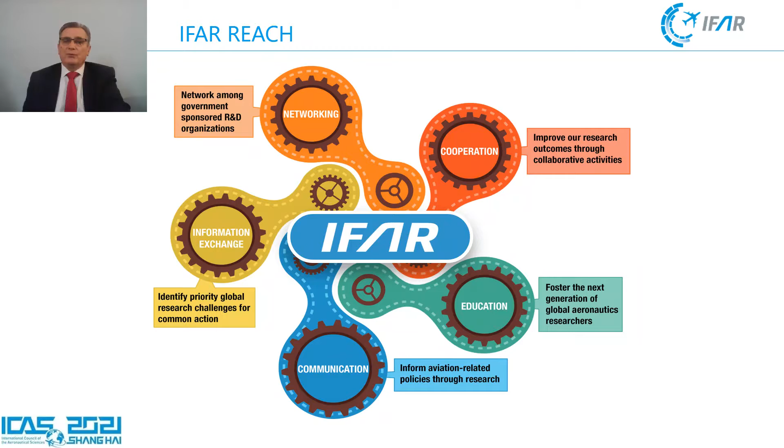Thank you very much and welcome to the IFAR ICAS lecture 2021, which is the ICAS conference general lecture number 5. The title is IFAR's Perspective on Sustainable Aviation. And the question is, can we achieve zero emission aviation and how can we achieve zero emission aviation? My name is Rolf Henke. I'm talking on behalf of the German Aerospace Center, DLR, and I will come to the other authors in a minute.

About a year ago, 13 members of IFAR published a paper on zero emission aviation. In Germany, where I come from, we have a paper on zero emission aviation from the DLR and the German Industry Association, BDLI. We have a couple of thoughts on sustainable aviation fuels. We have thoughts on FlyZero from the UK Aerospace Technology Institute. And we even have concrete aircraft by Airbus, ZEROe. So these are 3 types of aircraft flying with hydrogen. So a big topic, time to think about it, time to discuss it, which is the title of this IFAR ICAS lecture.

This lecture is organized in 6 chapters. After my short introduction, Sergey Chernyshev, our present chairman of IFAR and the chief scientist of the Russian TsAGI, will address the translation of zero emission into top-level aircraft requirements, TLARs. I will talk a little bit about the propulsion system and energy storage afterwards. Then Xiasheng, the head of the Chinese Aeronautical Establishment, CAE, will address the airframe systems.

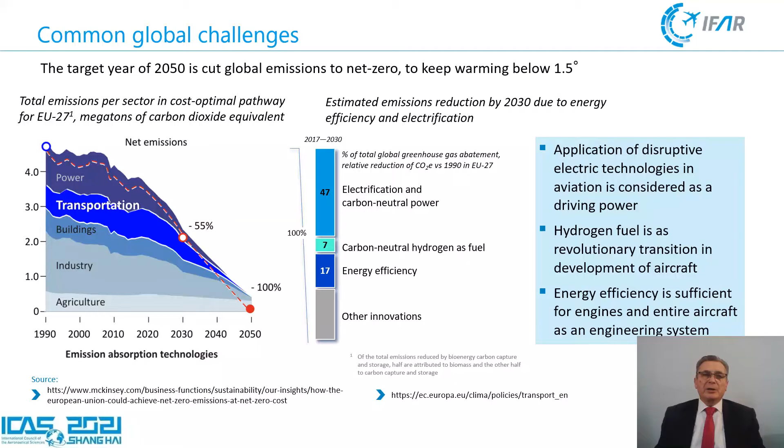An application of the cryogenic fuel is considered as a revolutionary step for the future of aviation. To make these steps, various IFAR research establishments and global aviation organizations develop their respective strategies and technology roadmaps. They introduce slightly different approaches, but more or less they come to the same strategic solution, considering liquid hydrogen as a fuel of the future. In the Russian Federation, the hydrogen initiative for the national economy has been approved on the government level.

The group of several IFAR members has recently developed its own view on zero-emission aviation. We call it ZeMA. The ZeMA group is aimed at the development of aviation which is free of negative impact on the planet, meaning close to zero emission, for the entire product life cycle. The ZeMA declaration was introduced to the world aviation community and public at the Berlin Aviation Summit in November 2020. It can be found in the public domain.

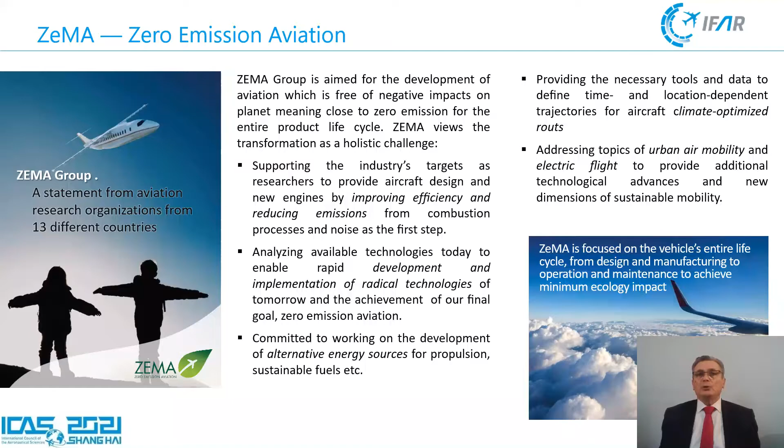By considering the various innovative solutions, it is required to define the profile of the future aviation transport. The task for the nearest decade is to implement upcoming technologies in future aircraft and to provide the technology basis for the next generation of aviation. By solving the problem of clean air transport, the focus was made on the class of aircraft that have the most severe emission share of CO2.

Considering technologies available now and in the nearest future, the reasonable concepts come to mind. Application of electric and hybrid electric power as propulsion for the regional and short-range aircraft applied on the typical routes connecting European countries, American states, distant state regions, etc. Application of the hydrogen fuel for the mid-range aircraft with approximately 100 seats or more.

The future concept should be proposed using real market parameters that would define so-called top-level aircraft requirements, such as fuel type, typical range, design cruise, emission level, noise level, operation costs, service goal, airport class. Based on these numbers, the proper selection of the technologies and their integration should be performed. Of course, the influence of other factors should be kept in mind. When we talk about application of new fuel, it is obvious to consider the corresponding infrastructure development and operation.

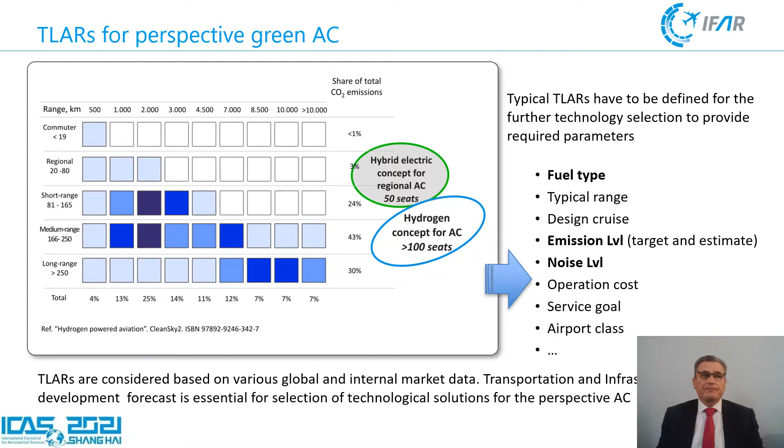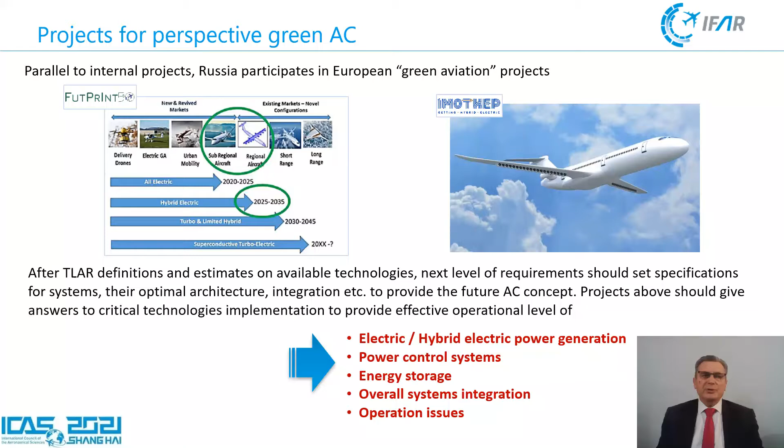Currently, Russia is participating in two European projects that cover the technology research on the mentioned aircraft types. The first one is FutPrInt50, which should provide the technology basis and system integration for the 50-seat regional aircraft. The second one is aimed at technological solutions for more than 100-seat passenger aircraft. Projects should give the answer to the critical technologies implementation to provide an effective operational level of electric, hybrid electric power generation, power control systems, energy storage, overall system integration, operation issues.

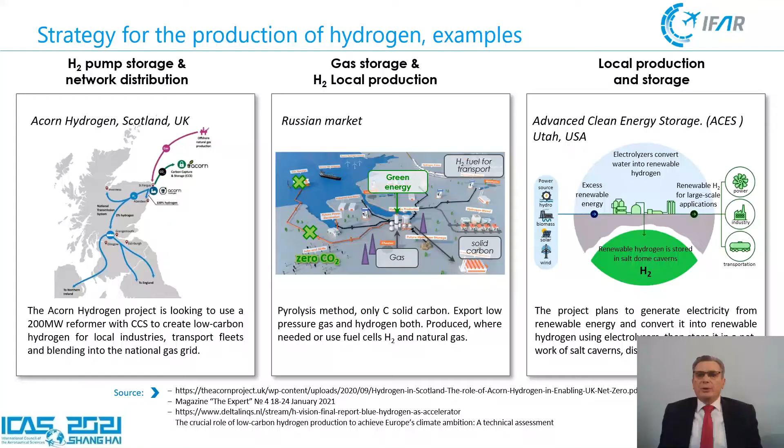As was mentioned before, the development of infrastructure is an integral part of the transportation system. Here in the slide you can see some examples of the strategies for the production of hydrogen. Various ways to provide future consumers are considered: H2 pump storage, network distribution, gas storage, and liquid H2 local production, etc.

And returning back to TLARs, for the regional aircraft, different concepts have been analyzed. TLARs should be implemented in the best way by considering available and upcoming technological solutions. Understanding of technological gaps helps to specify the topics of new studies and research programs. As an example, here in the table you can see the parameters of the regional aircraft required for the Russian market.

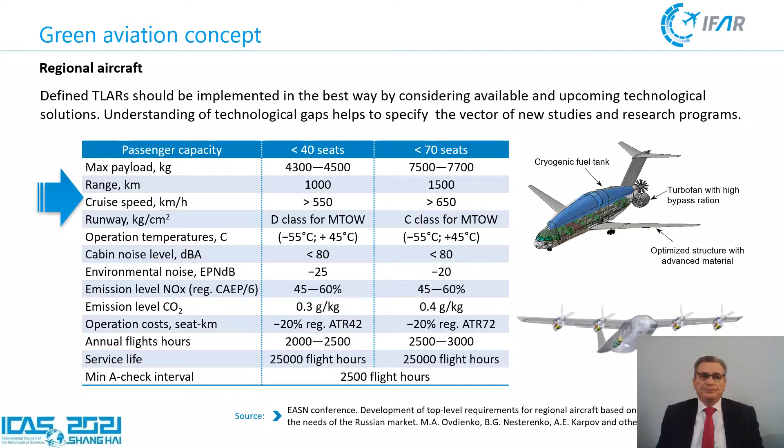To cover the technological gaps defined along with key technology development, the conceptual studies should specify parameters of aircraft systems for the future development. Shown in the slide is this example of a regional aircraft with a hybrid electric engine. Currently, there is a set of research projects in Russia aimed at technology development for hybrid electric aircraft with application of high temperature superconductivity technology. The concept aircraft is under development right now.

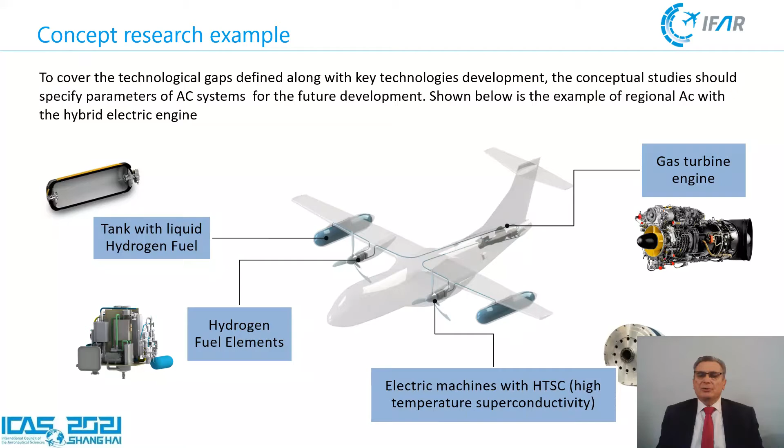At this stage, the flight technology demonstrator was developed and assembled by the Russian project consortium, led by the Central Institute of Aviation Motors, CIAM. This project has passed several successful stages, and target parameters have been reached both in the ground tests and in flight experiment. The technology demonstrator of hybrid electric propulsion installed on the Yakovlev Yak-40 jet engine aircraft flew in July this year at the International Moscow Air Show MAKS 2021. It uses an electric engine with a superconducting electrical system that was placed in the nose of the fuselage.

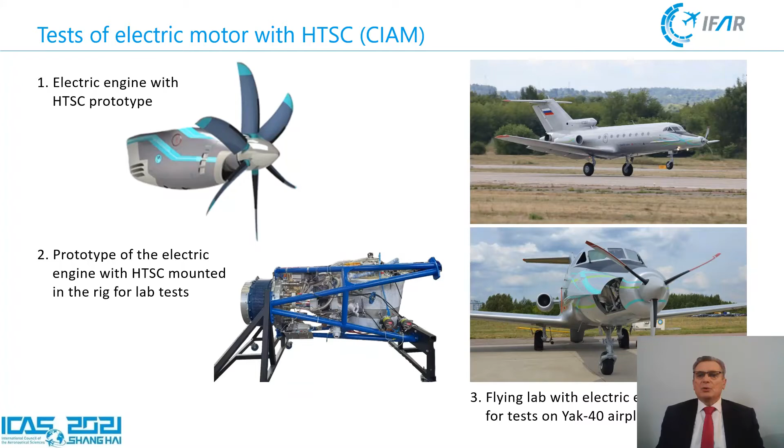Top-level requirements for large aircraft bring new challenges. Entire new approaches for aircraft design must be developed. Hydrogen as a fuel will radically change the aircraft configuration and structure for middle and long-range aircraft.

New airport infrastructure also must be under consideration for the new type of aircraft. New regulations and certification issues should come with that on a global scale.

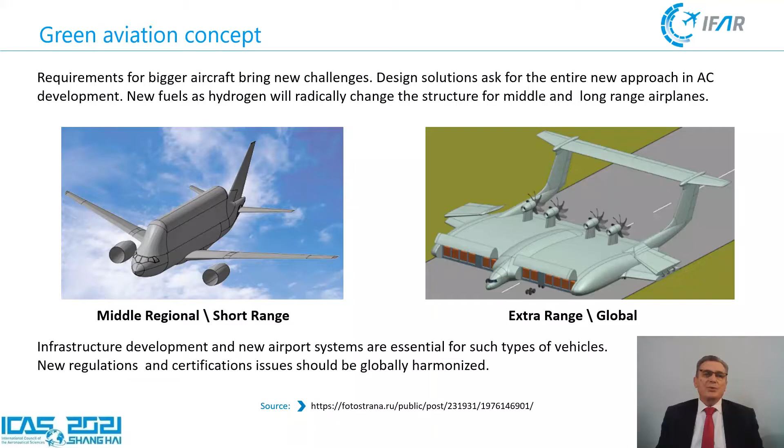Let's come to the second part of this lecture now, on the propulsion system and the energy storage. My name is Rolf Henke. I'm talking on behalf of the German Aerospace Center DLR. Content-wise, I will address the sustainable aviation technologies and challenges, take a closer look at sustainable aviation fuels and hydrogen, look at the aviation impact and technology assessment, and go for an outlook.

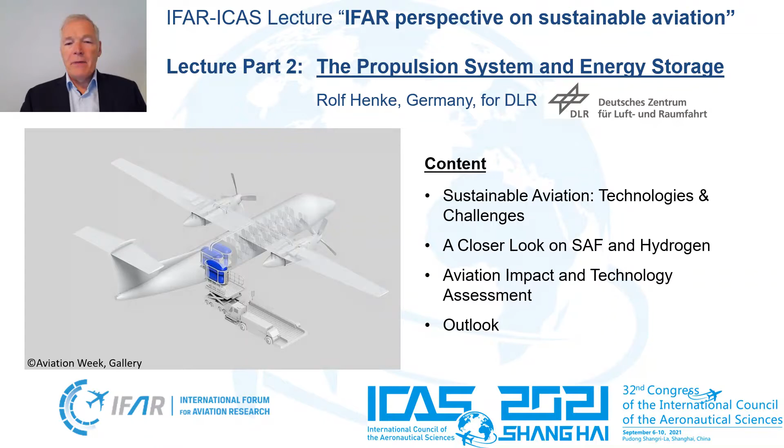These are the elements, the pieces of the puzzle we have available to shape the future of aviation. If I go in clockwise direction from the 3 o'clock position, batteries. We have new battery generations every couple of years. We have fuel cells. We can burn hydrogen directly in gas turbines. We may go for alternative fuels, sustainable aviation fuels.

We may need new configurations of the aircraft, I will come to that in a minute, new architectures of the aircraft and the aviation system as such. And finally go for new air traffic management, for example, on climate-optimized altitudes and routes.

Every one of these different elements may need technical solutions, may need certification, may ask for infrastructure on board or on ground, asks for different airspace, different air traffic management, and needs validated tools for design as well as for certification.

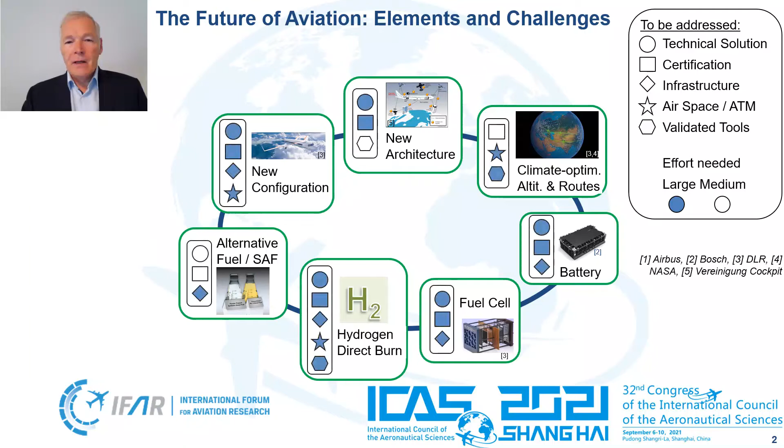And here you see the research effort needed for all these elements, and it is huge. We are by far not where we need to be to have really zero emission aviation. In addition, we need the links to atmosphere research, environmental chemistry, radiation medicine, research on acceptance, noise, technology assessment. So there's really much to be done.

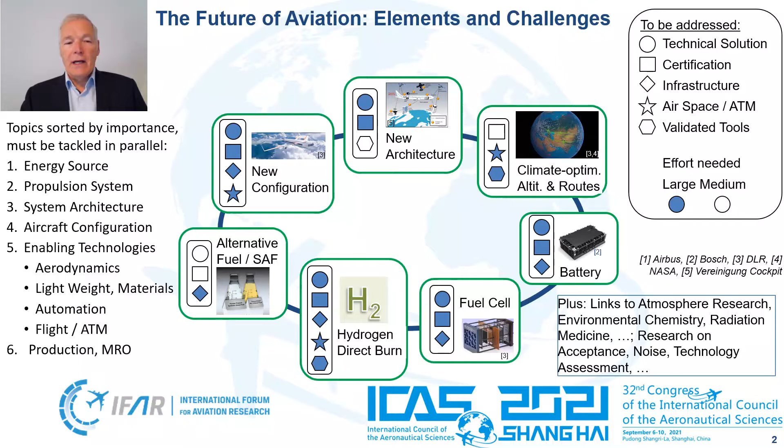Overall, we have a couple of topics to be tackled in parallel. It's the energy source, it's the propulsion system, but then also the system architecture, the aircraft configuration. All this will be very expensive, so we need enabling technologies for a better efficiency of the aircraft, which is aerodynamics, lightweight materials, automation, new ways of flying, so air traffic management. And finally, of course, we need new production systems and maintenance, repair and overhaul, so the whole life cycle.

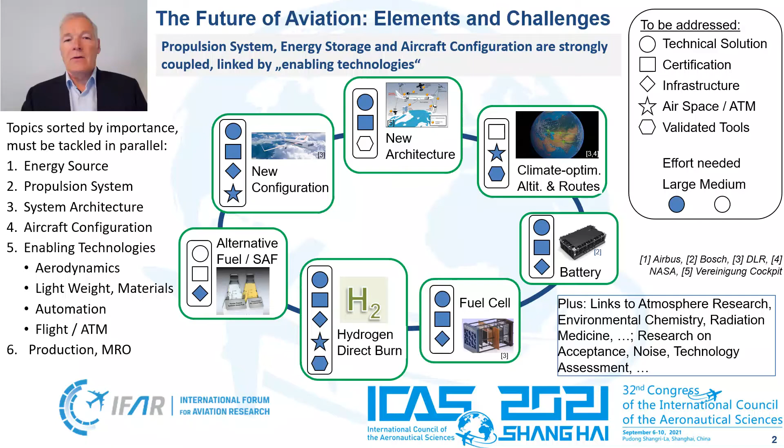The propulsion system, the energy storage, and the aircraft configuration, all these are strongly coupled, linked by what I call the enabling technologies. What do I mean with this? If we go for electric flight, the first ideas we had about a decade ago were really on noise.

And if we now have a look at the aircraft noise, these are the different elements. You see approach noise and takeoff noise, the parts coming from the engine and the airframe noise. All this adding up, of course, on a logarithmic scale, it's not linear. If we now change only the motor, so we still have the fan producing the thrust, but we change the motor from a gas turbine to an electric motor.

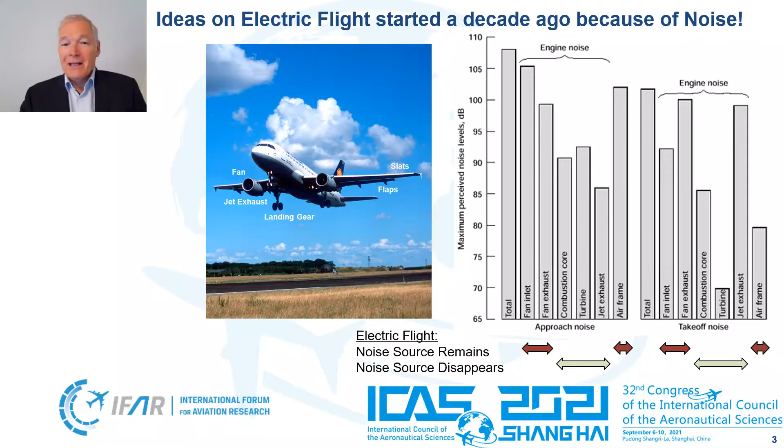Then we will still have a couple of noise sources, they will remain. So the fan is still running and producing the thrust. Of course, we get rid of the combustion, the airframe will still be the same. So without any change in aircraft configuration and the propulsion system, the major noise sources will remain.

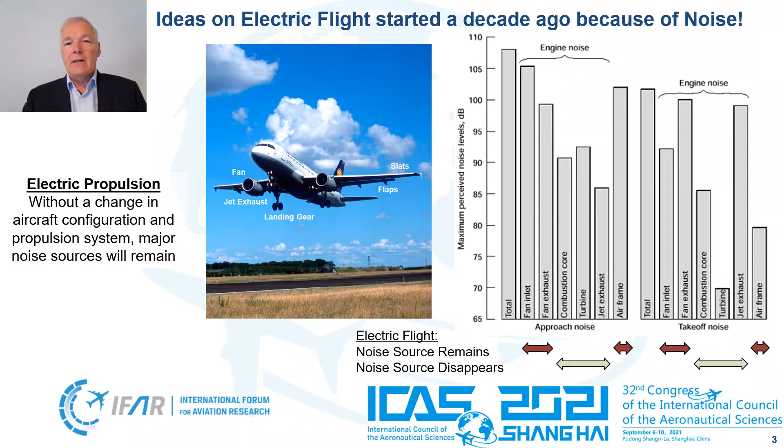So a pure substitution will not lead to a noise reduction, even though we change the propulsion and the energy storage. This means, as I said before, if we go for the propulsion system and the energy, we need to tackle also the aircraft architecture and the way to fly this aircraft.

Let's take a closer look now at sustainable aviation fuels, SAF. There are a couple of studies around these days. I just picked two of them, one from Roland Berger, another one from Air BP on the production of SAF.

If we take a more global view on the four different energy sources, battery, fuel cell, direct burn of hydrogen and SAF, you can see the changes in CO2 impact, on the aircraft design, whether we need large changes or not, the same on airport infrastructure, and finally on cost.

The two arrows on SAF mean that on the one hand, of course, we still have CO2 impact if we burn SAF, that would be the horizontal arrow, but due to the production and the overall balance, it's CO2 and climate neutral, that's the arrow going down. So in this case, SAF, it's both.

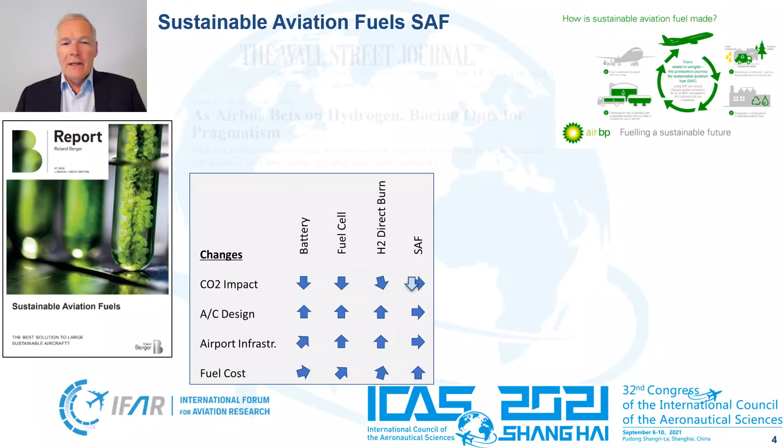Interestingly enough, now you can take a decision whether you bet on hydrogen or you bet on, as Boeing says, pragmatism. Regardless which company is betting on what, this picture just shows that you have to take a decision one way or another, and it will be very interesting in view of the next generation aircraft.

Overall, SAF technology is known in principle, but mass production will need at least some 5 more years. SAF still means burning hydrocarbon-based fuel, so we will have CO2, NOx, water, soot, unburned hydrocarbons. However, SAF will be the first major step, a bridge to zero-emission aviation. But we have not reached it yet, and it is of unknown length.

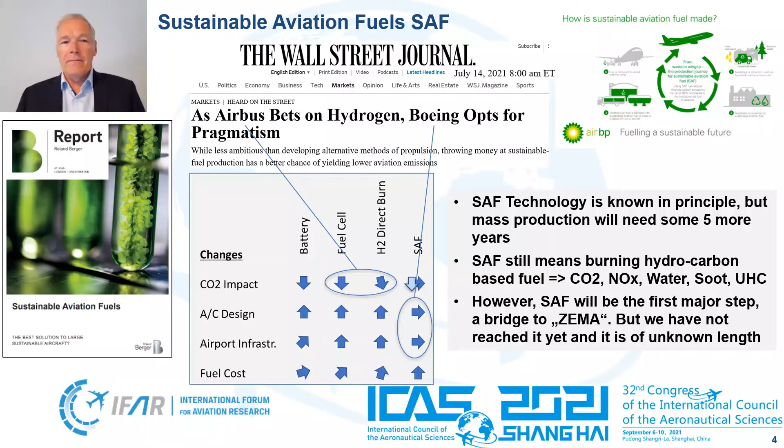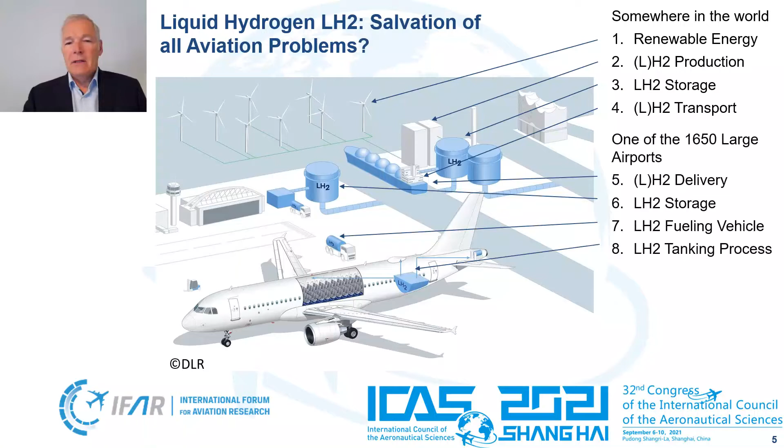Now let's have a look at liquid hydrogen, LH2. Will this be the salvation of all the aviation problems? What do we need? Worldwide, somewhere, renewable energy to produce hydrogen, store it and transport it to one of the 1650 large airports worldwide. Again, it needs to be stored there. We need then the fueling vehicles and the tanking process.

Aircraft-wise, on the 20,000 large aircraft, we need the tanks, we need the architecture and the engines optimized for the application of hydrogen. And the question is, why do we do all this? Of course, it's on the emission. So the aviation emissions in case of burning hydrogen will be combustion products like NOx, limited, but still there will be NOx. Maybe CO2 depending on the process. There will be contrails and there will be contrail cirrus. And both may cause problems, which we'll see in a minute.

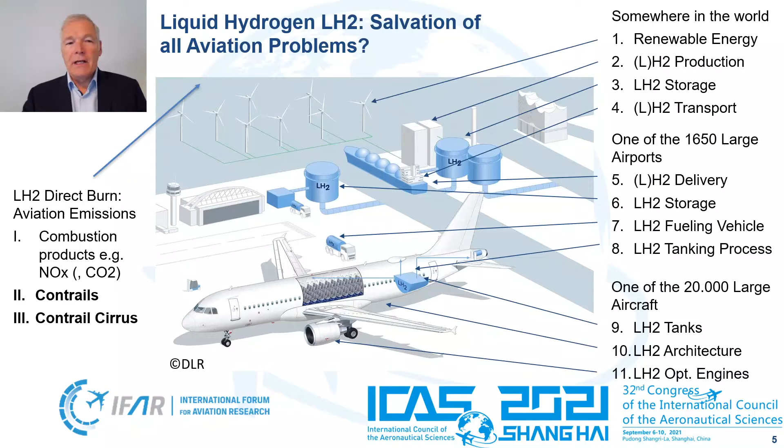So we don't have a complete idea on the impact, but we know that we have to change the complete system, not only the aircraft, but the complete system of aviation in terms of application of liquid hydrogen. Hydrogen applications by no means are new. Aviation even started with hydrogen on balloons and zeppelins.

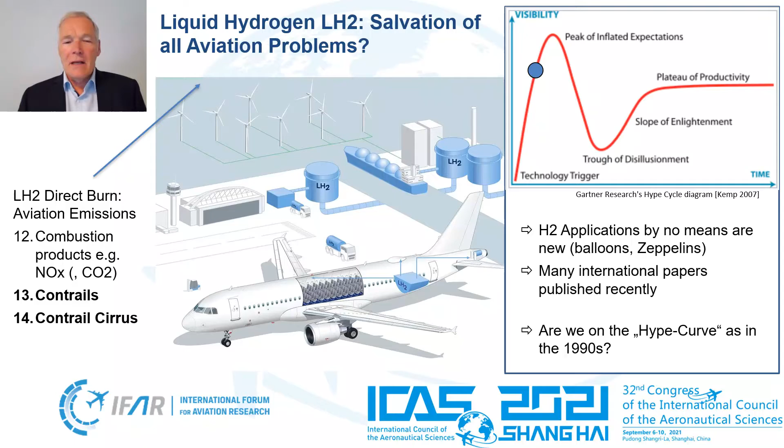Recently, there are many international papers being published showing an increased interest, if not expectation, for hydrogen. And the question is, are we on the hype curve again, as we have been in the 1990s? Meaning that we sort of inflate the expectations until we reach a peak, then we have to go through a valley of disillusionment until we reach a plateau of productivity. My impression is that is the case, that we are still not there yet, and that we sort of start to overload hydrogen. You have to take care and look what's the impact, what's the effort, and find clever solutions.

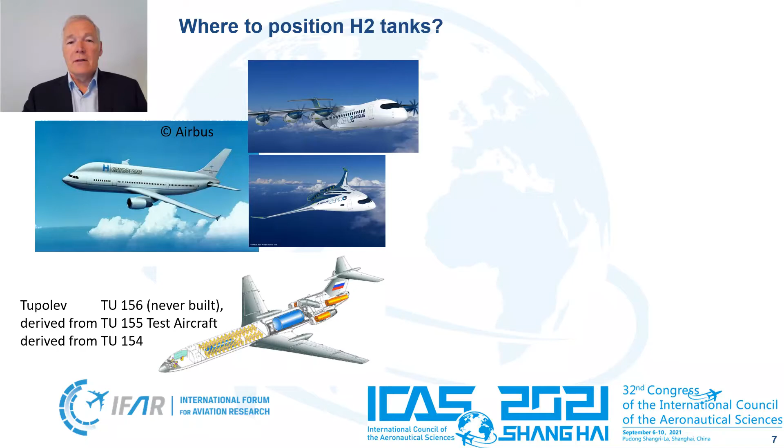One of the questions is where to position the tanks, the H2 tanks. This is the only example of a transport aircraft ever flown with hydrogen. It's a Tupolev 155, derived from a 154, and out of that test they designed the Tupolev 156, which unfortunately has never been built, but at least there was a concept based on flight test. There are a couple of concepts from Europe, from Airbus, Cryoplane. In my introduction I showed a couple of new aircraft from Airbus which will be hydrogen driven. There are concepts from research.

Universal Hydrogen is a company in the US. We have concepts, of course, from DLR. There's a NASA DLR design challenge, and this is a concept from the University of Stuttgart on an H2 driven aircraft and how and where to position the tanks. It's still a major question, the tanks. It's not solved yet in terms of TRL. We are somewhere at TRL 1 or 2, technology readiness level. So not really there concerning a product or even an entry into service.

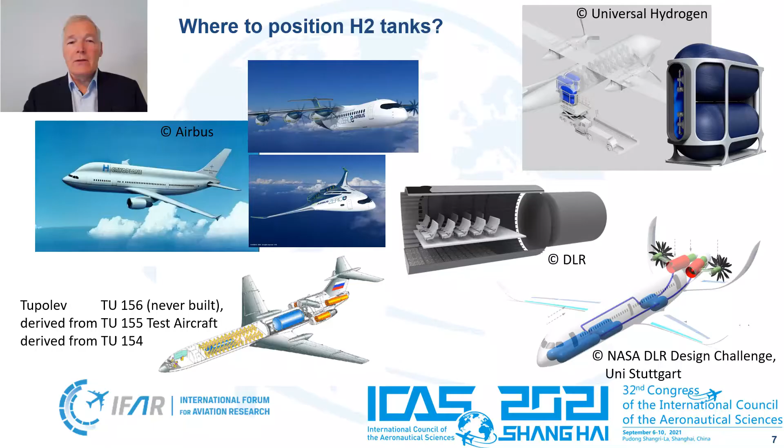Now let's come to the aviation impact on the climate. This is a very famous diagram showing all the elements contributing to this impact. It's measured in radiative forcing, milliwatt per square meter. On the right hand side it's warming, it's red, and on the left hand side the blue one is cooling. You see the different elements, CO2, NOx, water vapor, etc. Overall the CO2 is just 1/3 of the aviation impact. Non-CO2 elements sum up to 2/3 of the aviation impact in total.

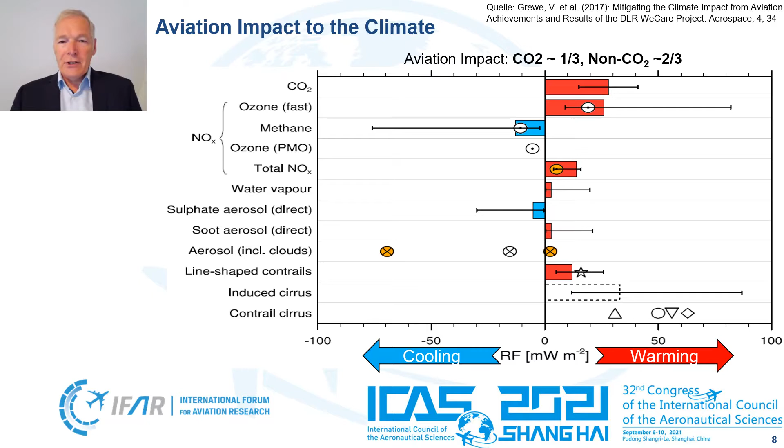If we now go for H2, hydrogen application, you see that we still have many of these elements like NOx, because it's a combustion process, water vapor, the contrails, the cirrus. So all this will remain, and water vapor is the strongest climate gas we know. So if we go for sustainable aviation fuels, we have all these elements. They may be then balanced by the production process on ground. If we go for fuel cells, we still have the water contribution, contrails, water and cirrus. And if we go for the direct burn, we have all this from fuel cells plus the NOx and eventually CO2 depending on the process.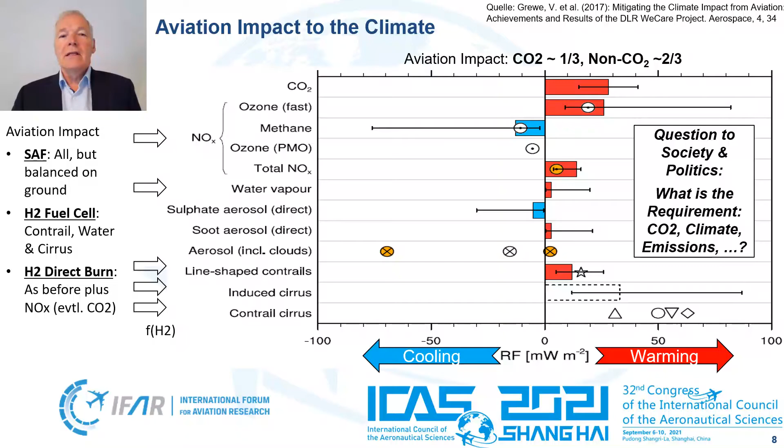So just going for hydrogen or fuel cells doesn't mean that we don't have emissions at all. So going for zero emission aviation is a complete philosophy, not asking only for an energy source and propulsion, but for the whole system. The question to society and politics will then be, what is the requirement? Do we go for CO2? That we can do, I wouldn't say easily, but we can do it. Is it on climate? Is it on emissions? And this needs to be discussed and decided before we go for the next generation of aircraft.

So this last foil then looks at the future of aviation and the future of aircraft propulsion, the title of my small part of the presentation. Today we have regional aircraft, helicopters, transport aircraft, etc., all with gas turbines and all running on kerosene, Jet A1. In the future this may look like this, with different sizes of aircraft: commuter, regional, medium and long range. There will maybe be different solutions: batteries, fuel cells, sustainable aviation fuels, hydrogen. The future will be manifold, which is good news for aircraft designers. There may be different solutions for zero emission depending on the category, and there will be a development from the smaller aircraft to the big ones.

So in the last 3 decades we had a pure growth of the aviation system, 5% per year, which was always good news. The next 3 decades we really have to look for a transformation of the aviation system to go for something which the European Commission calls the Green Deal, zero emission aviation.

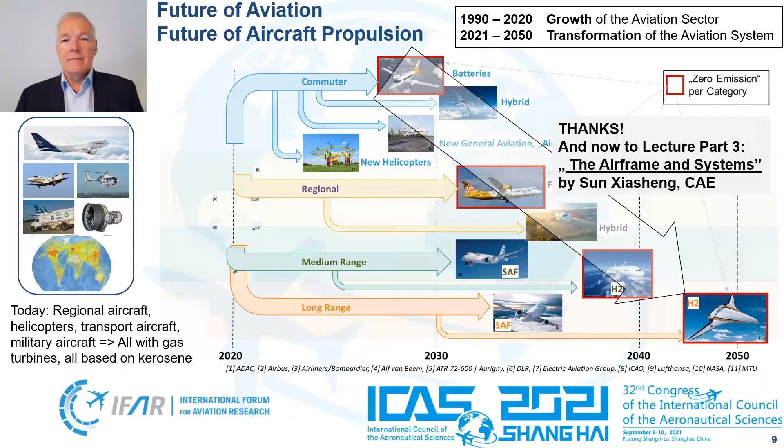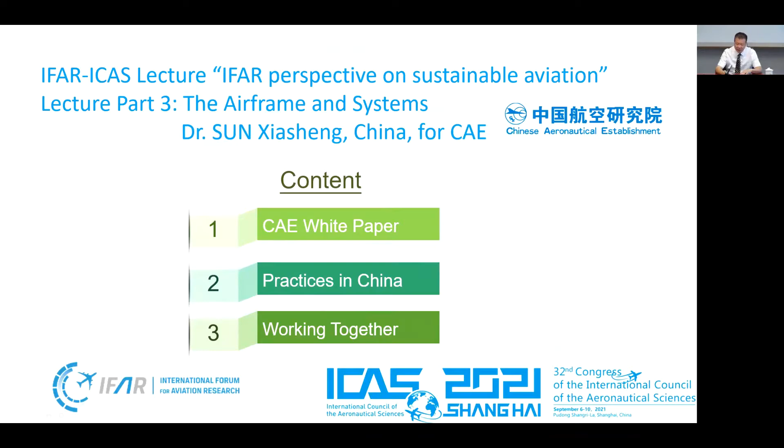It's an honor for me to share the overview of the development in airframe and systems of sustainable aviation in China. My lecture will be given in 3 parts. First, about the CAE white paper. Second, a brief on the best practice in China. Last, but not least, the approach to establish an ecosystem of development.

The national development concepts for China are innovation, coordination, green development, opening up, and sharing. In 2020, the Chinese government announced China aims to have CO2 emissions peak before 2030 and achieve carbon neutrality before 2060. The time is pressing, and to seize the opportunity, China must face the challenge at the same time.

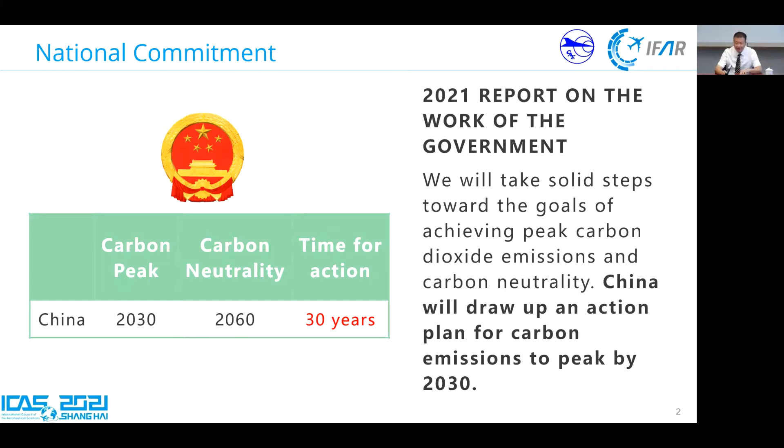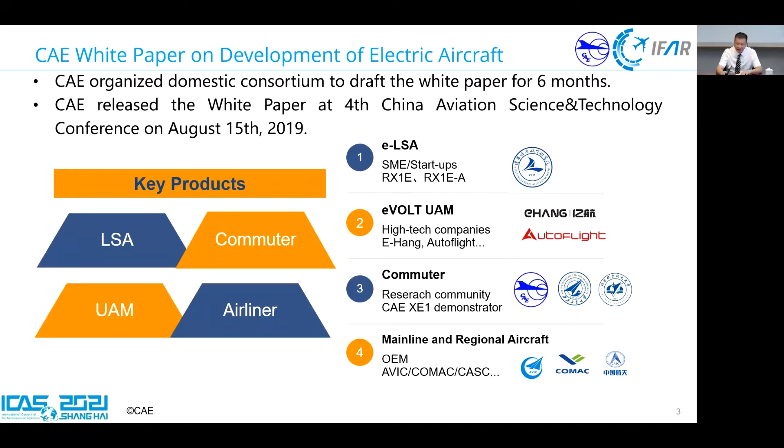CAE has been working on sustainable aviation for years, and amongst those is a CAE white paper on development of electric aircraft released in 2019. The white paper suggests that China should give priority to development of electric aircraft, varying from light sport to regional and mainline aircraft. Focus on the development of key technologies such as overall design, high efficiency and high power-to-weight ratio electrical propulsion, integrated energy management, as well as energy system.

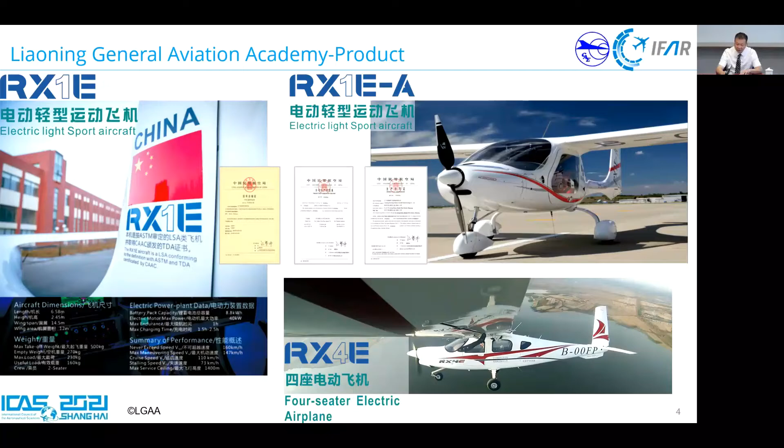For electric light sport aircraft, the priority will be given to all-electric propelled fixed-wing aircraft. The aircraft by Liaoning General Aviation Academy is the most successful product line in China. The Pioneer RX-1E is the first electric aircraft that completed certification in the world. The 1EA extends the flight duration to 2.5 hours with a maximum takeoff weight of 630 kilograms. Now, the Academy is working on the 4E. The 4-seater made its maiden flight in October 2019 and aims to get TC in the first half of next year.

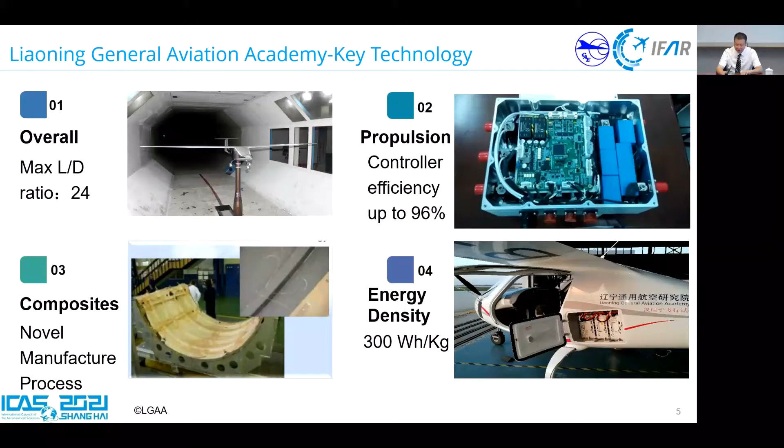The performance requirement of electric aircraft is mainly on range and flight duration, which are both limited by the energy density of lithium batteries. To achieve better performance and practicability, 4 highs should be reached: high aerodynamic efficiency, high efficiency of electrical propulsion systems, high battery energy density, and high structure efficiency. By achieving these factors, they made a success.

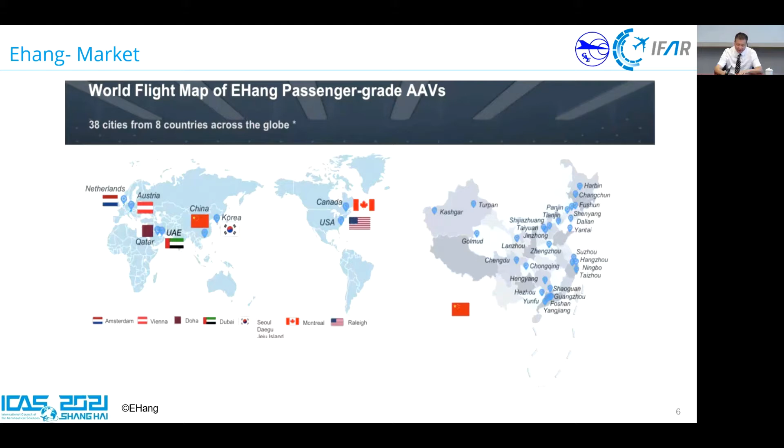For urban air mobility, priority will be given to eVTOL aircraft. One example in China is EHang Company. It is focused on an autonomous aerial vehicle, AAV, technology platform. Its AAV and solutions cover the need for passenger and logistic air mobility, smart city management, and aerial media solutions. The product types of EHang AAV include single seat, double seat, firefighting, logistics, and the AAV operating platform involves operating system, command and control, vertiports, and charging systems.

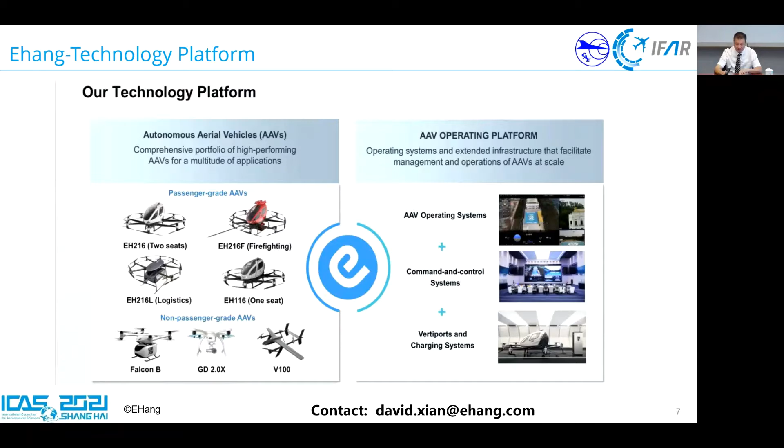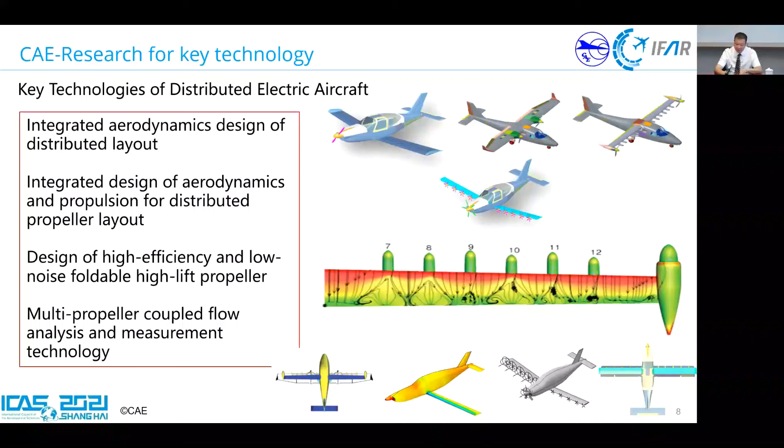For commuters, priority will be given to all-round hybrid electric commuter aircraft. CAE proposed a distributed electric propulsion layout, which uses the configuration to solve the range limitation caused by lower battery energy density. With this approach, 40 to 50% cruise efficiency improvement can be achieved on commuter aircraft and more than 20% on regional aircraft, which can make a greater contribution to the practicability of all-round hybrid electric aircraft.

Another major research team in China is the key laboratory of aircraft electric propulsion technology at Northwestern Polytechnical University, supported by the Ministry of Industry and Information Technology. The lab has developed a distributed electric propulsion demonstrator.

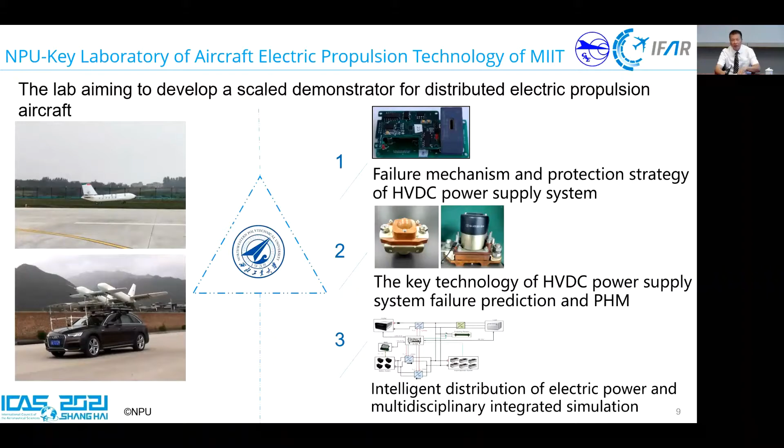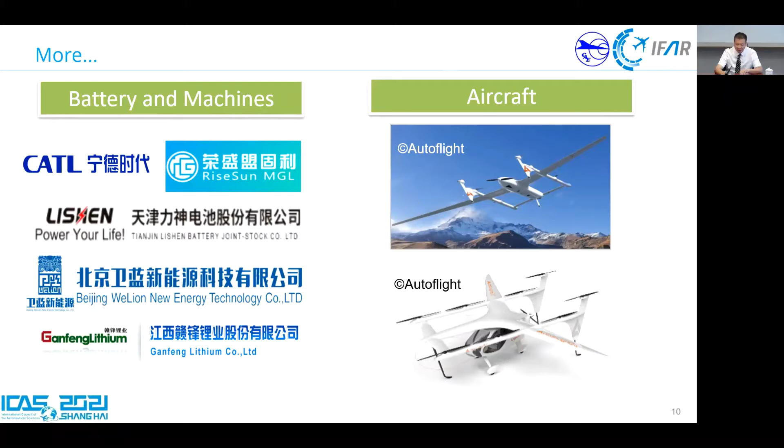Apart from the above, in China there have been many startups working in batteries, machines, and airframes. I have listed a few on the slides. Companies like CATL and MGL have made the greatest progress. In the interest of time, I'm not going to elaborate on all of them, but their contribution should not be ignored. For the research of key technologies for electric regional and mainline aircraft, there are some projects in planning recently.

For the better development of electric aircraft, it's important that we establish a sustainable ecosystem that puts every player in their best position. From my point of view, it should be built in 3 tiers. Tier 1, the OEM, like COMAC, works on the whole picture to conduct research on small electric aircraft, as well as mainline and regional aircraft by benchmarking its traditional models.

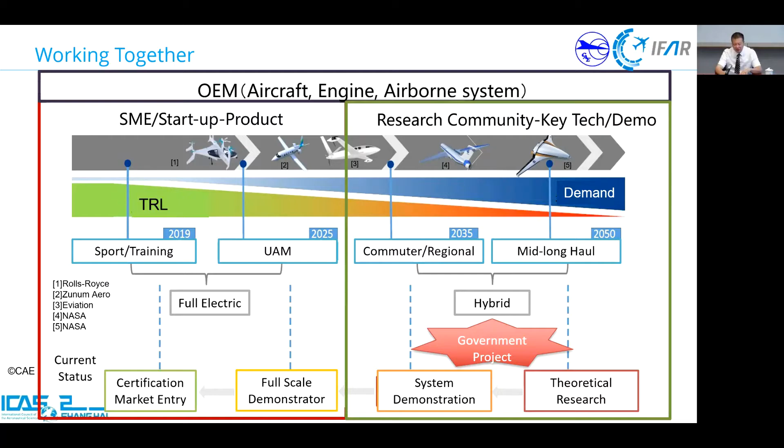Tier 2, SME and startup companies like Liaoning Ruixiang and EHang attach importance to products, pursue short-term market returns, and focus on light sport aircraft and UAVs that have a relatively high technology readiness level. Tier 3, the research community like IFAR members, aims at next-generation aircraft to carry out key technologies research and system-level demonstration and verification studies supported by government projects.

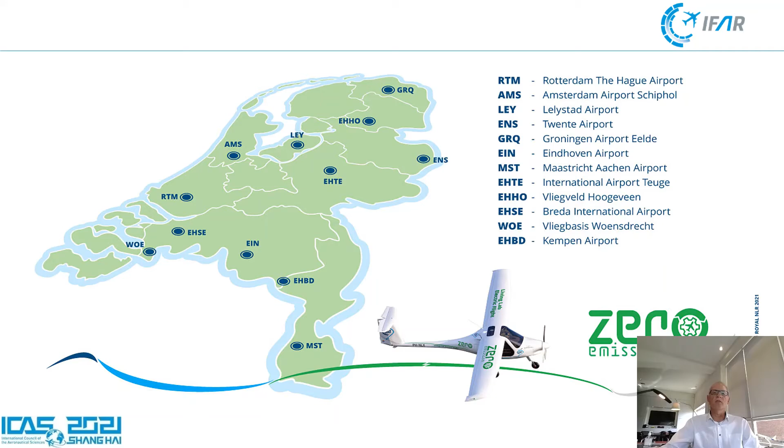And it's true, the aircraft are small, the endurance is not that large, but it's here to stay. And one of the goals of NLR, together with the national and international colleagues, is of course to improve the range of that aircraft to more operational, usable parameters. Well, some words about that aircraft itself. We learned a couple of things. We already knew that the range, the endurance, is very limited. You have 30 minutes, and then an additional 30 minutes of reserve.

At the airport itself, you need, of course, a charging infrastructure. That's not so severe for these smaller aircraft, but you can easily imagine when electric aircraft become larger and larger, you really need to change the grid, the infrastructure. You have to pay attention to the charging conditions, the correct temperatures. No unattended charging is yet possible due to safety requirements. The fire department has to be instructed, and how strange it may seem, in the beginning it was really difficult to find insurance, and the latter, by the way, is solved by now.

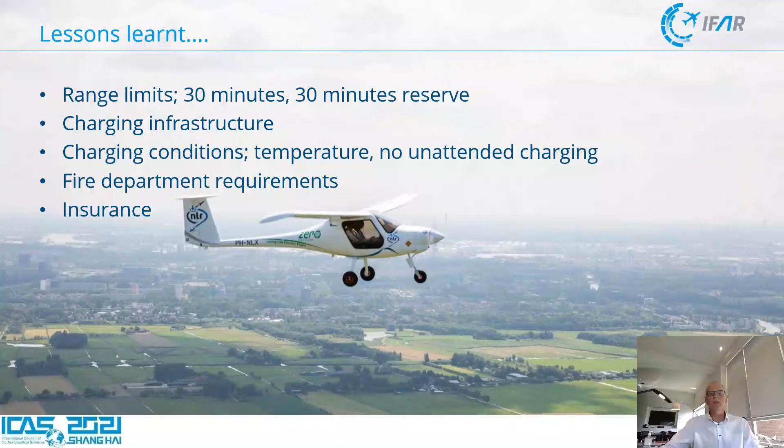So what does that mean? We all understand that such a small aircraft, only a two-seater with 30 minutes endurance, less the reserve, is not of much operational use. But just to mention, it's now being widely used, at least in the Netherlands, and as I understand also elsewhere in Europe, for initial pilot training. For initial pilot training, such an aircraft is very well suited.

But we all know that there are a lot of activities throughout the world, smaller companies, larger companies, with the next generation of electric or sustainable aircraft. And what you can see most is that they are talking about 9 to 19 passenger aircraft with a range, I would say, up to 500 kilometers and perhaps even a little bit more. That is, from an operational point of view, still a limitation, but also an opportunity.

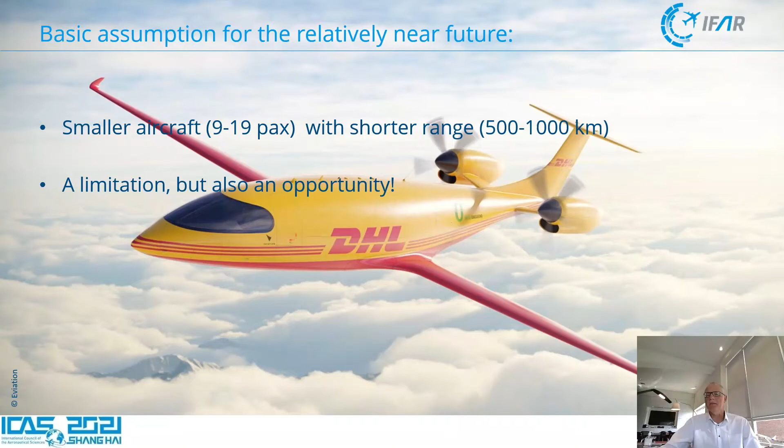If you look at the Netherlands, within that 500 kilometers, you can find major European cities like London, Paris, and Berlin. So that could certainly be a possibility for a new business model. Because nowadays when you want to fly, then you normally travel to a larger hub, and from that hub you fly to where you want to go. And if it's a longer flight, then sometimes before reaching your destination you have to change planes.

Now, if we have smaller planes with a limited range, then more point-to-point trips are possible, I think. And that means something for the larger international hubs, but it also creates a new business opportunity. And from a passenger point of view, and I'm quite sure that everybody in the audience of ICAS travels a lot, basically every traveler wants to travel point to point, so that in one direct flight, you reach your destination.

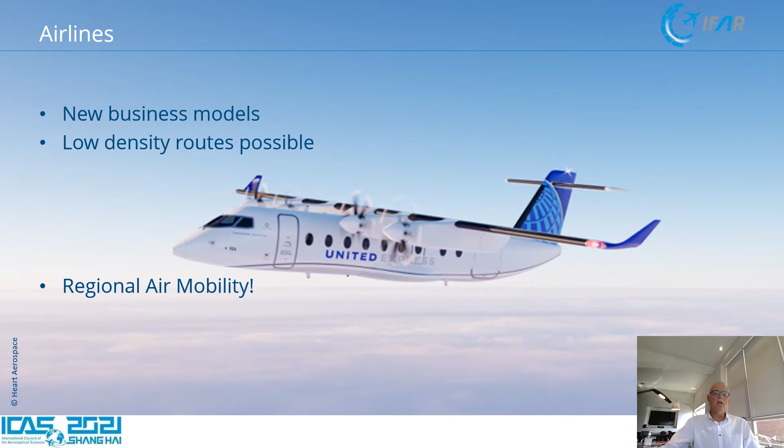So with those smaller zero emission aircraft or sustainable aircraft or climate neutral aircraft, new business models are possible, and also low density routes can be created and are commercially viable. That means regional air mobility, and that means an increased chance for regional airports. But it means something not only for the aircraft, of course, but also for the airports. I mentioned that a little bit in my previous slides.

The airport itself also wants to become zero emission, or at least climate neutral. So they are experimenting, that's happening in the Netherlands, but also outside of the Netherlands, I'm sure, with electric pushback for the larger aircraft, electric taxi. It also means something, of course, for the ground support equipment.

When you have aircraft which have batteries or hydrogen as an energy carrier, you need a refilling infrastructure in that sense. When you have electric aircraft, and especially when they are becoming a bit larger than our Pipistrel, then it means that you really need some grid adaptation for the electricity, and a lot of electrical power has to be transported. But also the filling of hydrogen is of big importance, and hydrogen can be a little bit dangerous, and that means that you have to adapt the procedures.

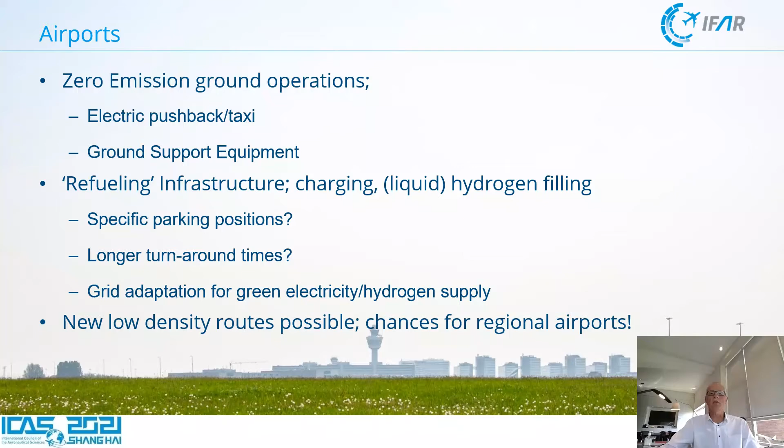But again, like I said, new low-density routes are becoming more and more commercially viable, and those are chances for the regional airports. With respect to ATM, air traffic management, things change because you have more differentiation in aircraft types. Slower aircraft, faster aircraft, flying higher and lower, and more aircraft in the air. And that means that the separation of aircraft can become more and more stringent. Also, the noise footprint remains of importance.

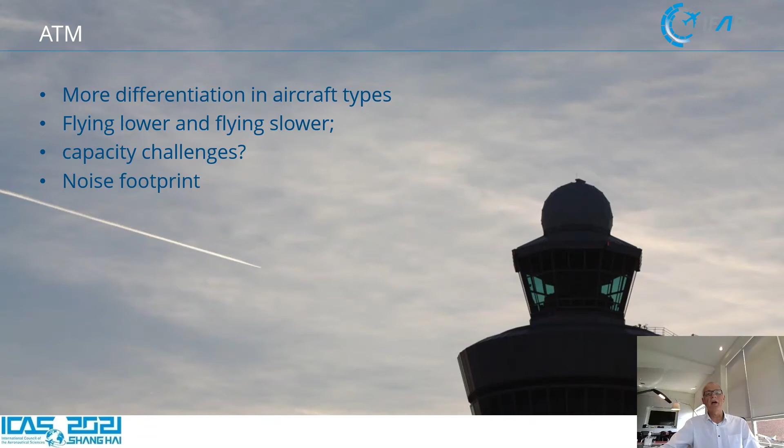We did some measurements on the electric aircraft. And even a fully electric aircraft makes some noise. It's less, certainly it's less, but it's not zero. And zero noise emission, I think that is virtually impossible. Every object that flies through the atmosphere makes some noise. But you have to do something about it to minimize it.

So, to conclude this part of this lecture series, sustainable aviation is a necessity. Everybody agrees on that, there is no debate about it. But it can also be concluded that the technical challenges are very large. It's not an easy jump, but it can be done. The other side of the coin is that it also gives new mobility opportunities. So I'm very, very confident that this road towards sustainable aviation is a viable road, and it will be a full reality not only for small aircraft, but also for larger aircraft.

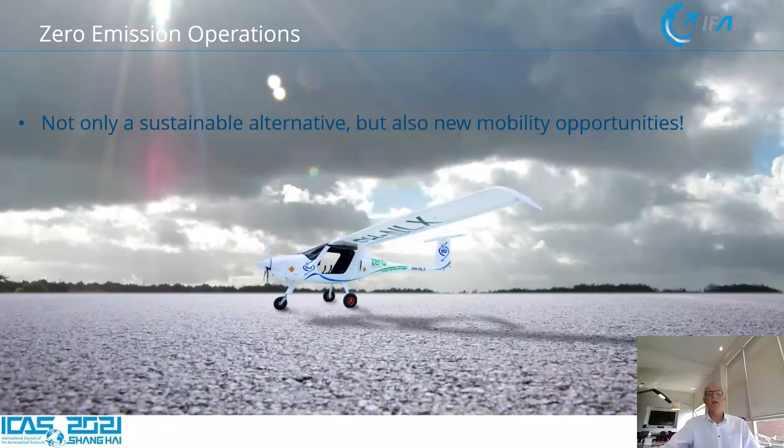I'm happy to be here today with my colleagues from the International Forum for Aviation Research to talk about perspectives on sustainable aviation.

First, from a societal perspective, I think it's important to understand that the application of our research needs to deliver public benefit. And I think today those public benefits need to be in the form of greater system sustainability, greater mobility, in order to give citizens across the globe greater access to resources and opportunity, and certainly economic growth, again, for all citizens across the globe.

NASA has a perspective around 4 transformations that will do just that. First, in the upper left-hand corner is the ultra-efficient transport. Today, subsonic transports are the backbone of our aviation system, and will continue to be so for the foreseeable future. And so we need to make them as efficient as possible. We need to enable them to utilize 100% sustainable aviation fuels, and we need to make sure that they operate as efficiently as possible.

In the lower left, ultimately we see the need to increase the speed by going to supersonics and maybe even eventually hypersonic speeds, to shrink the globe even more, to bring the globe together even more. There are high hurdles to do that in a sustainable way. At NASA, currently we are working on the sonic boom signature, trying to get the noise that is created by supersonic aircraft down to acceptable levels so that they can be flown over land. But there are certainly a lot of other hurdles in terms of efficiency of operation, landing and takeoff noise, emissions in the upper atmosphere, and so forth.

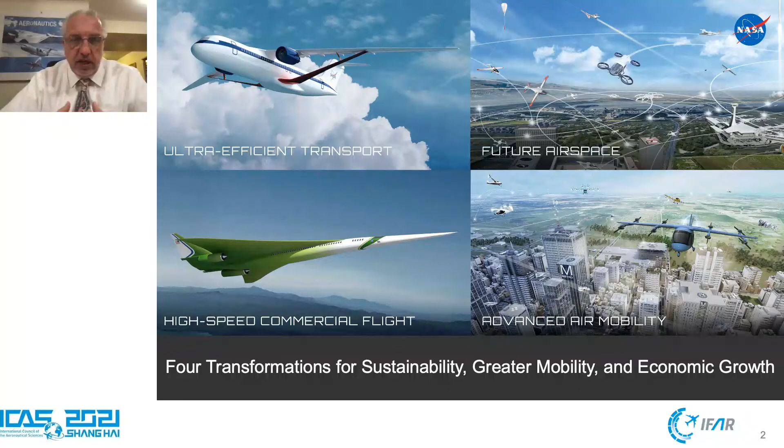And in the upper right, all of these things have to fly in an airspace safely and certainly as efficiently as possible. And therefore we want to make sure that all of these vehicles can fly along their optimal trajectories and achieve their business cases, but doing that in a way that allows all of them to operate simultaneously and at scale. So that's a very challenging capability. But taken together, these 4 transformations can bring those societal benefits I was talking about: sustainability, greater mobility, and economic growth.

So let's talk about the context for sustainable aviation. Of course, the International Civil Aviation Organization is where standards and goals and systems are harmonized for global use, and certainly that's the case for environmental impact and environmental standards. And the most recent is the release of the ICAO adopted carbon reduction goals. But what's notable about this is that the goals that have currently been adopted by ICAO, which is carbon neutral growth from 2020, are not as aggressive as what the global aviation industry is striving for, which is a 50% reduction in carbon emissions by 2050 and ultimately net zero emissions.

And I think what we'll find over time is that as industry pushes towards these more aggressive goals, and as our research organizations enable industry to push towards those aggressive goals, then ICAO will continue to study, analyze, and adopt these more aggressive goals as well. And certainly ICAO is working at just that right now. They're working on assessing these more aggressive industry goals, and will likely, or we certainly hope that they will, adopt these goals in future resolutions.

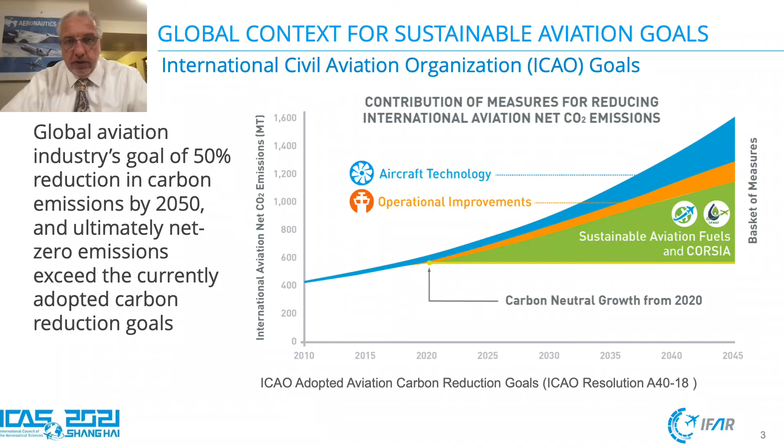Within the U.S. and certainly within NASA, what we've done is taken a perspective on what can we do for the next generation, and then what can we do beyond the next generation. And let's bring the combined research talents and capabilities of NASA, and within the U.S. FAA, industry, academia, and so forth, around common goals that can bring us together to deliver technology at high TRL that will enable industry to make decisions on next generation transports.

And so the kinds of things we're looking at within what we're calling the Sustainable Flight National Partnership are advanced engine efficiency and emission reduction technologies, including going to a hybrid electric system. We want to advance airframe efficiency, and here you can sort of see a top-level iconic picture of the transonic truss brace wing, which is one concept that could provide greater airframe efficiency. We want to enable integrated trajectory optimization.

It's one thing to have a very efficient aircraft, both airframe and engine, but we want to make sure that that system is flown as efficiently as possible along the most efficient trajectories possible. And also to be able to make sure that we're bringing into account things like potentially contrails and other things. How do we both minimize carbon emissions, but also do things like minimize contrail formation? And of course, we want to be able to enable use of 100% sustainable aviation fuels going forward.

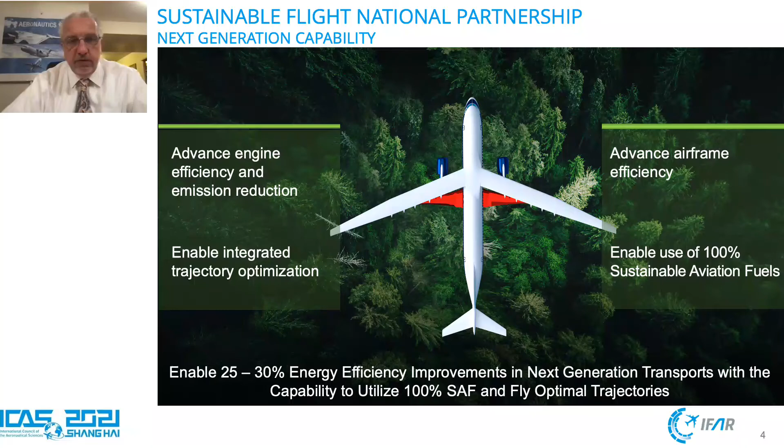In order to be successful, that needs to be done in a partnership, and it needs to bring together all of the key players. And so what we're looking at, again, for a Sustainable Flight National Partnership, is working together with the Federal Aviation Administration, with the Department of Energy, industry, and academia, everybody bringing their talents together, their capabilities in strategic partnerships that will enable the most critical technologies, the most impactful technologies, bring those to TRL 6, bring those to flight where needed.

So we are planning on doing some very large-scale flight demonstrations, do large-scale ground demonstrations in key facilities where that's the appropriate way to go, and do that in a synchronized way so that by around the mid-20s or so, we could have a full suite of technologies, including, like I said, hybrid electric, advanced turbine engine technologies, advanced airframe technologies, and so forth. Bring them all together around the same time so that it provides industry the best opportunity to make decisions to bring the most efficient next generation transport to the table.

Beyond next generation, we need to look at what is it going to take to enable aviation to essentially do net zero emissions and net zero impact to the environment, which is the real goal. Now that's a very bold goal, to have net zero impact, but I think it points us in the direction we need to go. And even while we're working on those next generation technologies that will bring substantial efficiency improvements, greater use of sustainable aviation fuels, and so forth, we can be working at low TRL, looking at those fundamental breakthroughs that can actually deliver net zero impacts.

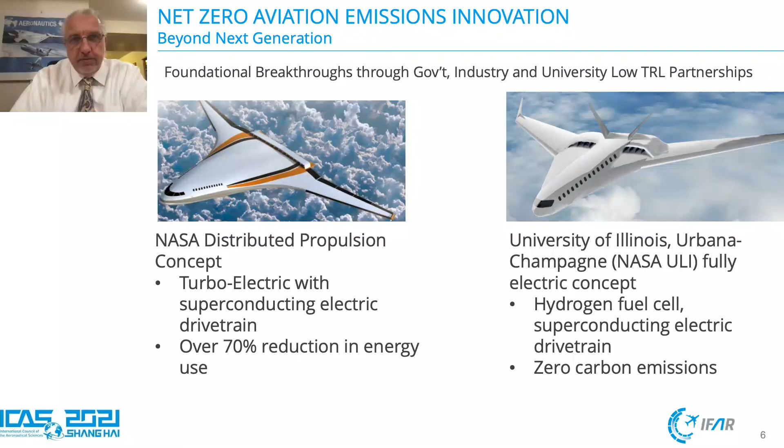Following my colleague's earlier presentation, this will be part 6, or the last part of the lecture that focused on the technology roadmap towards zero-E. Hi, my name is Ibrahim Yimer, and I'm the Director General of the Aerospace Research Center at the National Research Council of Canada. By way of a quick outline, I'll start off with the decarbonization roadmap, followed by where we're today and where we're heading in the journey towards zero-E, and then try to conclude with some specific roadmaps.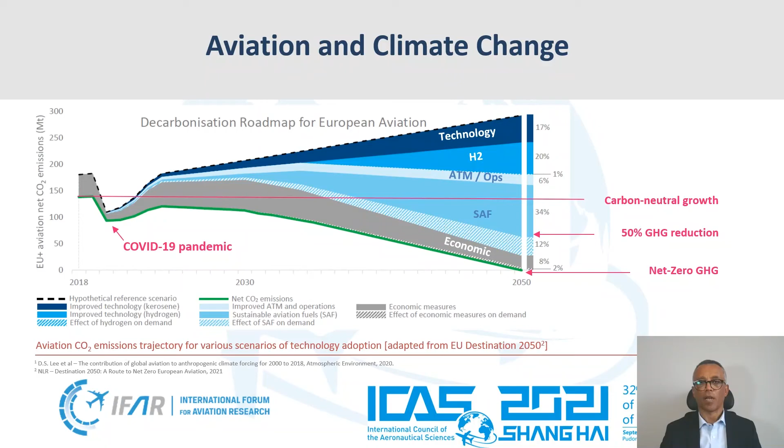So now let's look at what it would take to realize an electric or hydrogen-powered aircraft of the future. I would say both the challenges and the benefits scale up with aircraft size. Today, we are primarily at the kilowatt scale of the propulsion system size, and we should see commercialization of aircraft in the general aviation, commuter class, and UAM segments in the very near term. In fact, according to some sources, there are over 200 electric aircraft under development right now, some by traditional market players, and others are completely new entrants into the market.

Due to the smaller size and range, this sector could most likely use any of the available clean energy sources such as batteries, hydrogen, or SAF. However, it makes up only about 1% of the total GHG emissions from aviation.

Now, as we move to the larger regional jet size, we'll most likely need some degree of hybridization, where batteries can be combined with hydrogen or SAF. There are only about 5 demo aircraft programs that we know of that are under development today, that will most likely serve as a major proving ground for novel propulsion technologies before we see any scale up to large aircraft sizes.

And as we get to the short-medium range aircraft, we've seen only 2 companies that have publicly announced plans to develop a new aircraft technology. Of course, Airbus with their ZEROe that you all know, and Wright Electric with the proposed all-electric aircraft. At this segment, batteries are most likely no longer a suitable option, and we will see either a hydrogen or SAF-fueled aircraft. This segment is also the largest contributor to aviation's GHG emissions at 43%, and will be really a key sector to make the technological advances in order to meet the overall net zero target.

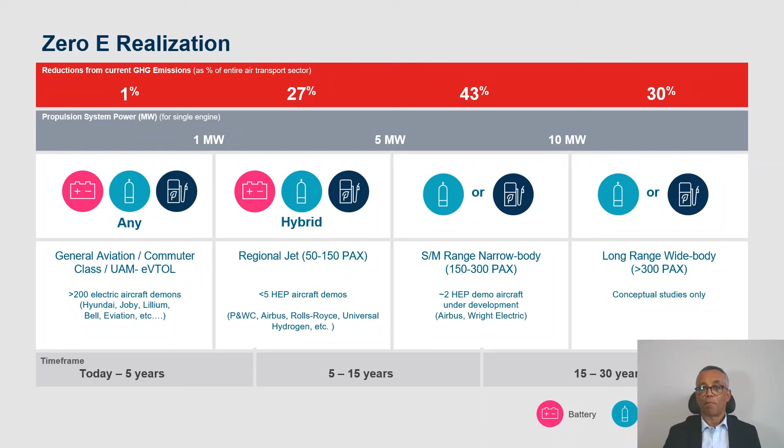From a technology performance standpoint, we do see generally a great increase in the overall propulsion system efficiency and the cost to operate. However, key metrics like passengers, payload, and range are all lower than an internal combustion powered aircraft. We still need battery energy density to significantly improve in order to compete with the performance of an IC engine powered aircraft. I would say the same is true for a need to improve hydrogen storage efficiency.

The other lessons learned, and Rolf has touched on it earlier, is on the installation of battery packs or H2 storage, which is really not standard across the various demos we've seen today. Each has its own merits and challenges, and we may need to eventually see some convergence of this from a safety and regulatory perspective.

Now, here are some examples in the immediate horizon. And again, we see some differences in the configurations. On the top, you see the image of DLR and MTU proposed hybrid electric Dornier by replacing the engine on one side with a 0.5 megawatt electric motor that may be battery or fuel cell powered. In the middle, you will see Pratt & Whitney Canada and de Havilland Canada are replacing one engine of a Dash 8 with a hybrid configuration that has a gas turbine combined with an electric motor.

And at the bottom, Universal Hydrogen and its partners are proposing an all-electric hydrogen fuel cell powered aircraft with a 2 megawatt propulsion system. Therefore, although these are small in numbers, these demonstration programs will provide significant learning and a big step towards Zero-E in the near future.

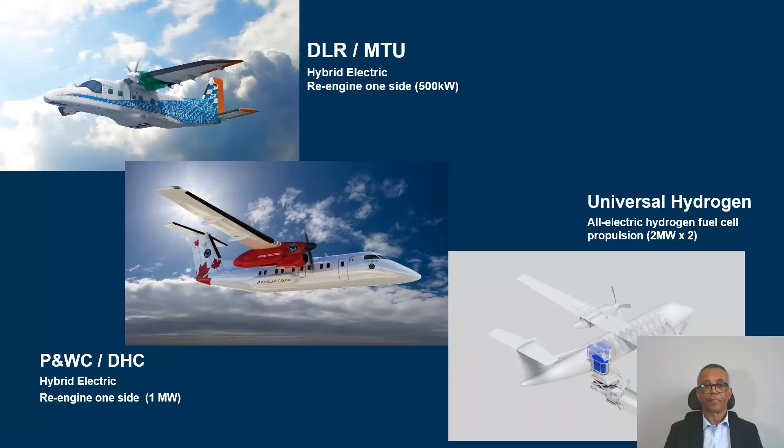But before we get there, or in order to get there and further scale up to larger aircraft, here are some of the technologies that are needed. Just to touch on a few of these. Battery pack energy density is currently today around 170 watt-hour per kilogram. And some studies suggest that we need to get above 700 watt-hour per kilogram for large aircraft application.

Today, electric motors for aviation have been demonstrated up to 2.5 megawatt with a power density of about 5 kilowatt per kilogram, but we still need motors with specs greater than 5 megawatt and a power density of about 13 kilowatt per kilogram. And for implementation of hydrogen, one of the largest barriers to overcome on board the aircraft is the weight penalty of the tank.

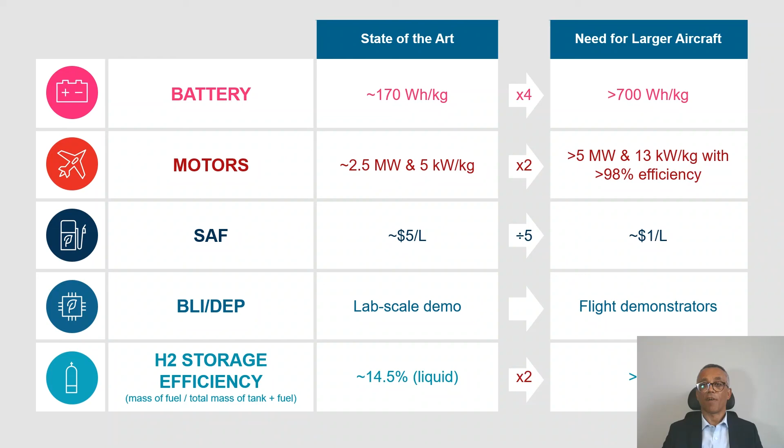A useful metric, perhaps, is the hydrogen tank storage efficiency, which is really basically a measure of how heavy the tank is compared to how much fuel it holds. Currently, the state of the art is around 14.5%, but studies have shown that we need to improve to above 35% for large aircraft applications.

Now, besides the technical challenges, of course, there are other challenges in moving towards electric or hydrogen aircraft that are not just aircraft related. For example, large amounts of electrical energy will be required for charging batteries or producing SAF or producing hydrogen. As well, new airport infrastructure will also be needed. For example, a recent study showed that replacing the jet fuel at Montreal Airport alone will need the equivalent of about 11 terawatt-hour of energy and 220 kiloton of hydrogen. So we will really need to have a multi-sectoral approach with all stakeholders involved, from the fuel and electricity producers to airports to regulators and to OEMs and others.

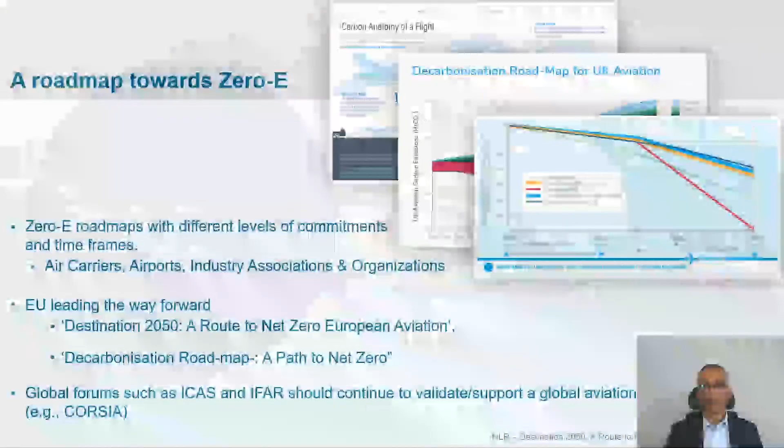And now to conclude with some comments on published roadmaps. We've seen the development of several zero-E roadmaps towards achieving the aviation emission targets I mentioned at the top of this presentation. While there is really a shared goal and target to be achieved, they have different levels of commitment and timelines. Obviously, it's difficult to provide a comprehensive summary and a comparative analysis in a short presentation like this one. But I would just say that they range from roadmaps by individual airports and air carriers, for example, American Airlines, to industry associations and organizations such as IATA and ICAO.

The EU, European Union, seems to be leading the way and has put out some very good examples. Worth mentioning are Destination 2050, which I mentioned earlier, by NLR and its partners, and a Path to Net Zero by Sustainable Aviation in the UK. Two documents that I recommend reading if you haven't already done so.

Now, having said all of this, I believe international forums such as ICAS-IFAR and ICAO should continue to contribute towards the development of a global framework, much like CORSIA, in order to make it easier to engage broader stakeholder groups outside of the aviation industry, such as fuel producers, and achieve aviation emissions targets globally with collective effort.